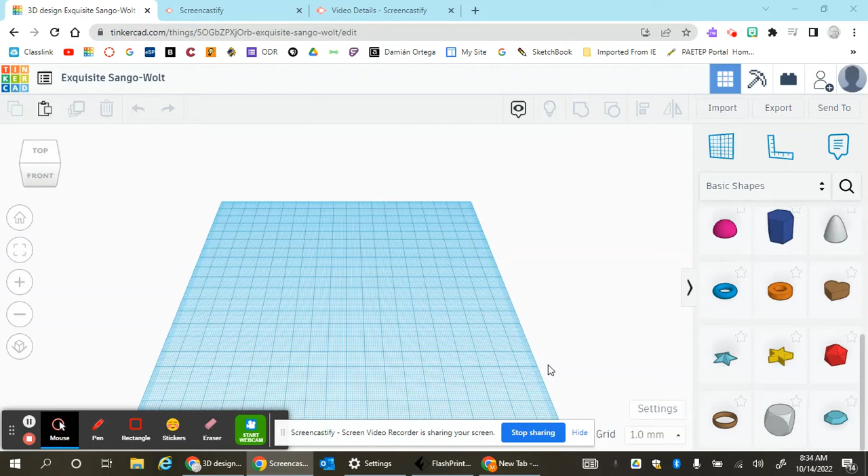This video, I'm going to make a ring that has a design in between two smaller rings, two thinner rings. So I'm going to take this ring and just crush it down to about, let's say, 3.

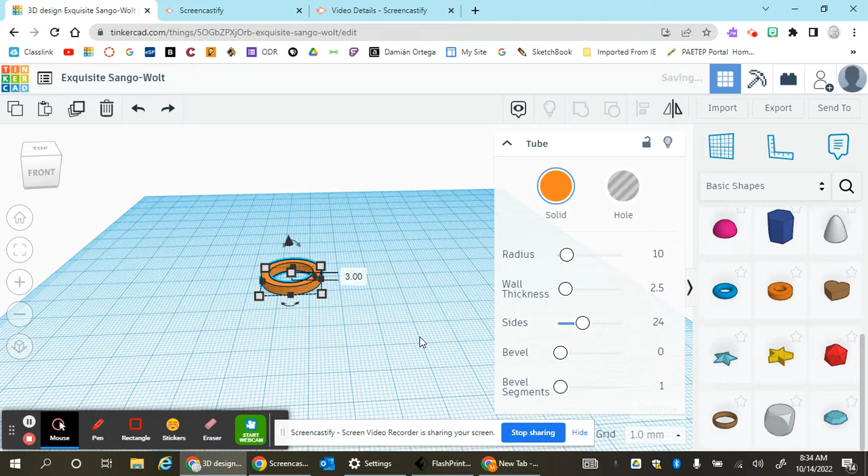Don't forget, when you drop this down, this tube has a hard edge for a ring. You can take this and curve the edges just a little bit so it slides onto your finger a little bit easier.

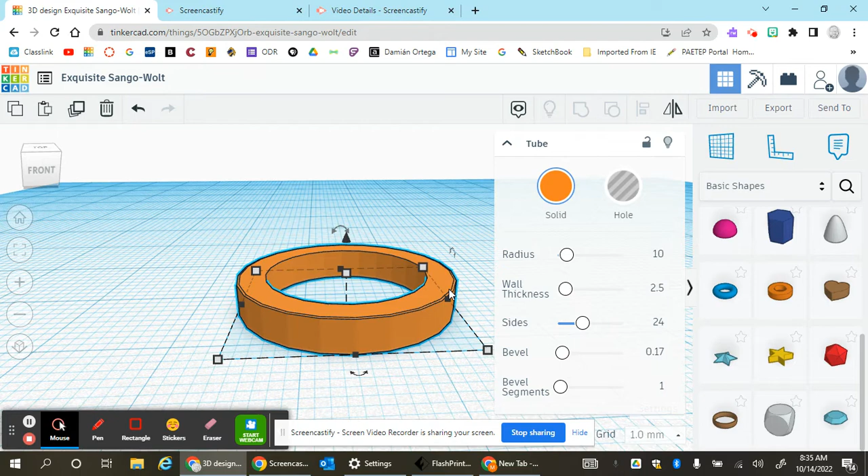So I have this ring. I'm going to make 2 of these. I'm going to copy and paste, Control C, V. And I'm just going to leave this over here, actually I'll take it and raise it up.

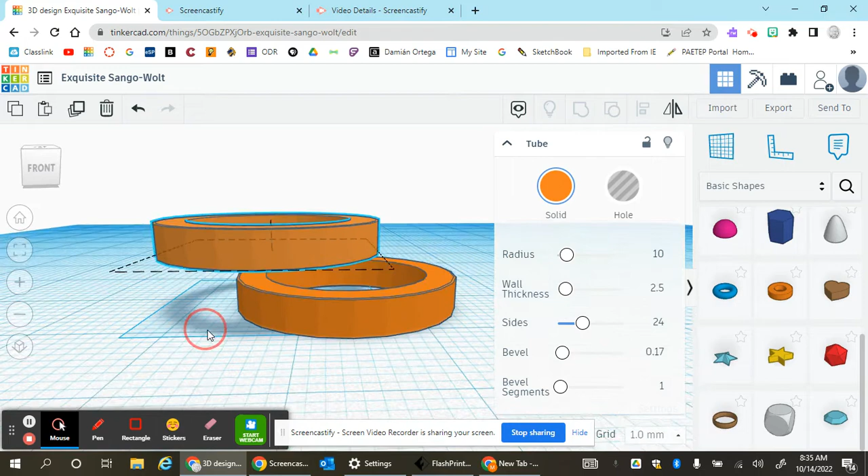Go to a side view, trying to get a little space in between these two. And now I'm going to align them, just left and right, so there's that space in between.

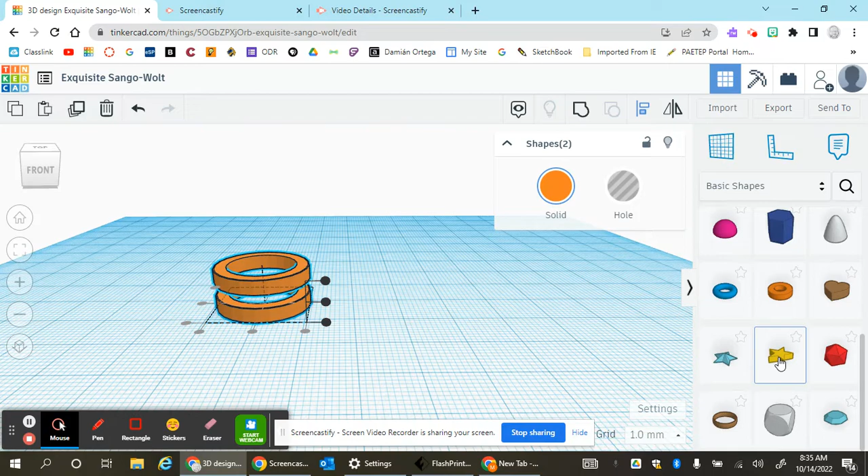I'm going to fill this with a pattern in between these 2 rings. I'll take this star shape. Looks pretty big, I'm going to shrink this down, hold down Shift. I'll change it again later. I want these 2 feet of the star to be on the bottom.

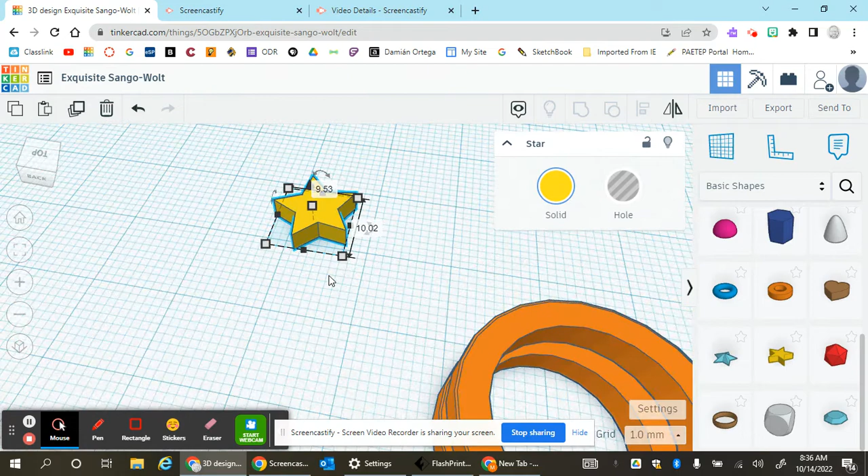So I'm going to choose this rotation here. I have my star. I'm going to raise it up to the surface. I'm going to type in 0 here.

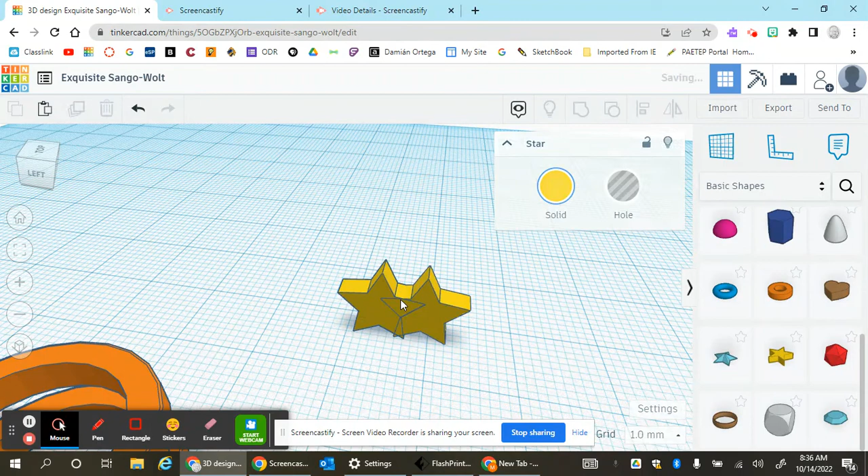Now I'm going to make 2 of these. I'm going to spread them apart.

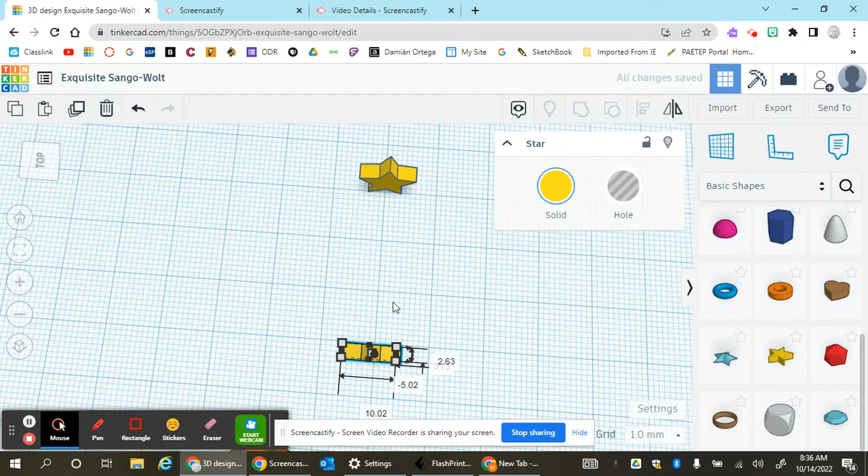And just like the last video, I'm going to spread these 3 of these bigger blocks apart. Go to a top view, orthographic.

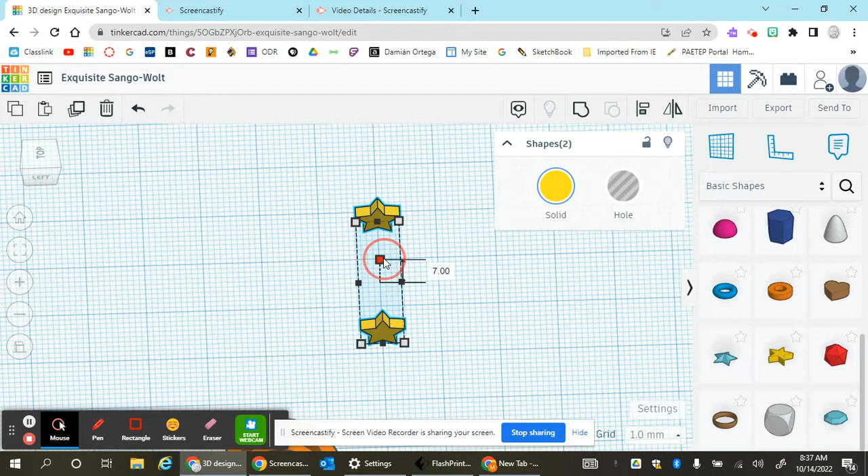I'm going to make these a little bit smaller for this, so I'll hold down Shift and make these stars just a little bit smaller for this trick to work. Let me spread these back out. 1, 2, 3.

Top view. All right, so I got 1, 2, 3 blocks in between. I'm going to align them.

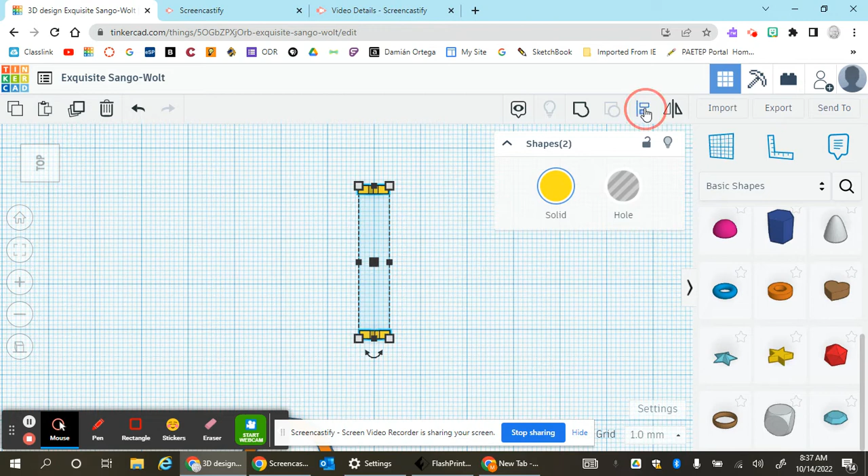Now I'm going to copy them, or I'm sorry, select both of them, hit duplicate. This time when I rotate them, I don't want them to touch. I want them to be separated this time.

So I went to 45 degrees. I'm going to let go. And now hit duplicate again.

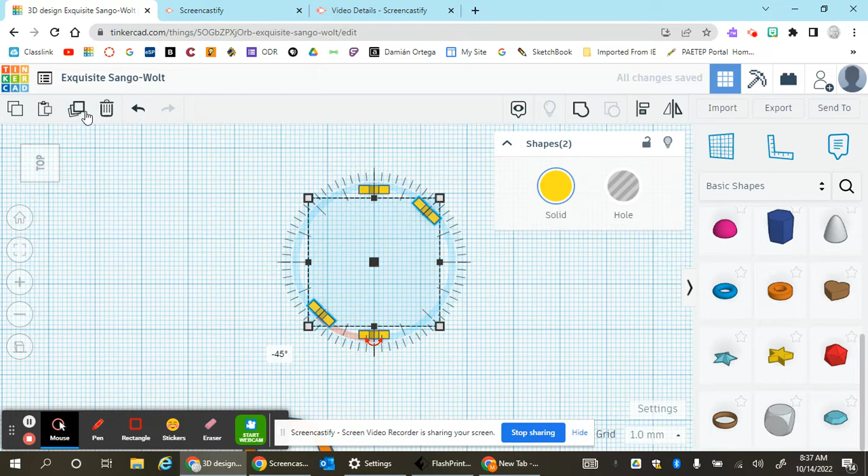So now I have this pattern, but there's a space in between all of them. Once you have these spaced out like this, group them.

And now it's simply a matter of getting it to be the same size as these rings over here.

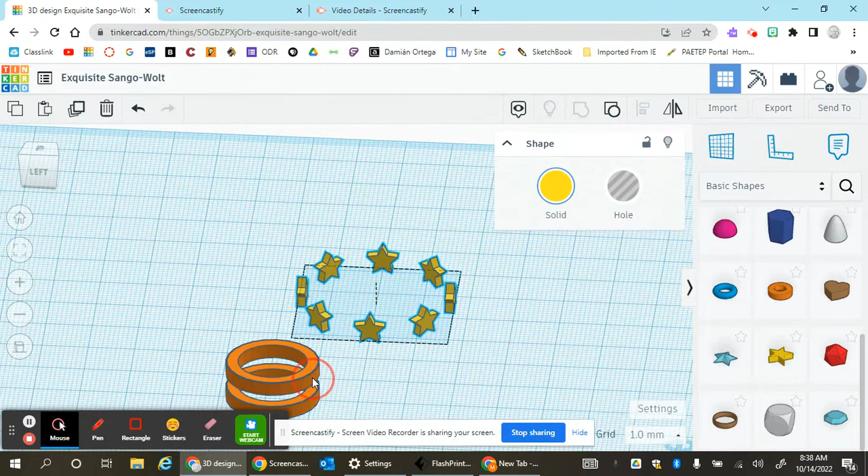If I take these 2, I'm going to group these for now. See how it's 20 by 20? So I'm going to take this ring over here that I just made with the stars, and I'm going to change this to 20 by 20.

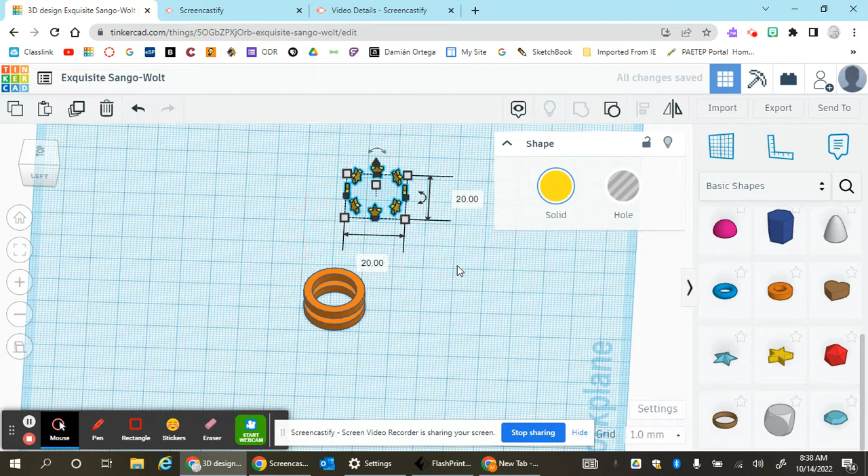I should be able to drag this and drop it right in between here. Let me zoom in, it's pretty close. I'm going to push it up a little bit. I should be able to figure this out now with just aligning.

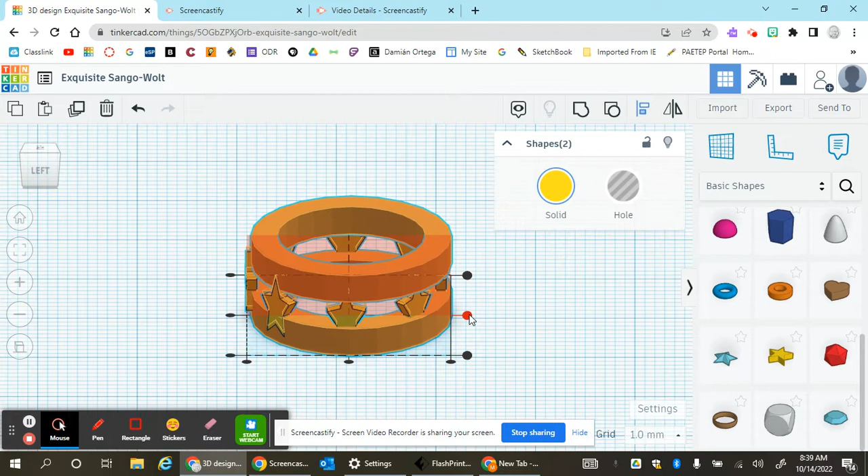So select all of everything, align. This time hit the one in the middle, left and right. So now that star pattern, it's nice and balanced right in the middle of it, and it goes right between both of the rings.

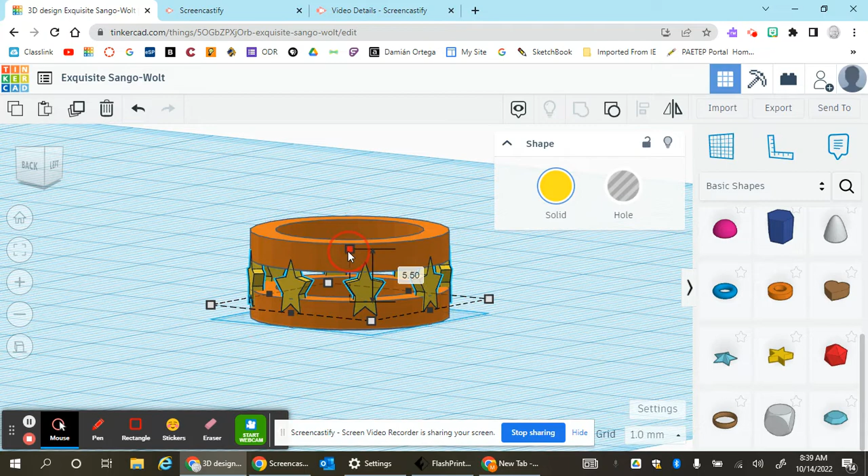Looks like the stars got stretched out a little bit, so I'm just going to crush this down so they look like stars again. That looks about right. Let me try this again to align.

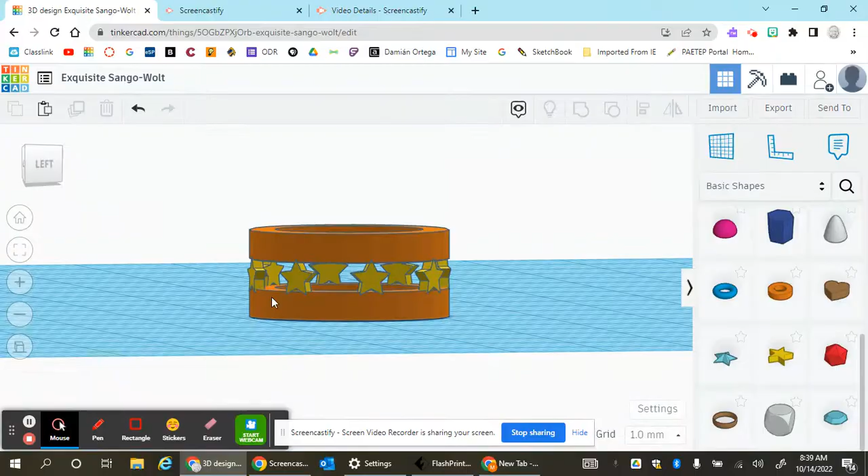All right, so it can be done with any of the shapes, but now there's a way to put a pattern in between two rings. Select all this and group the whole thing.